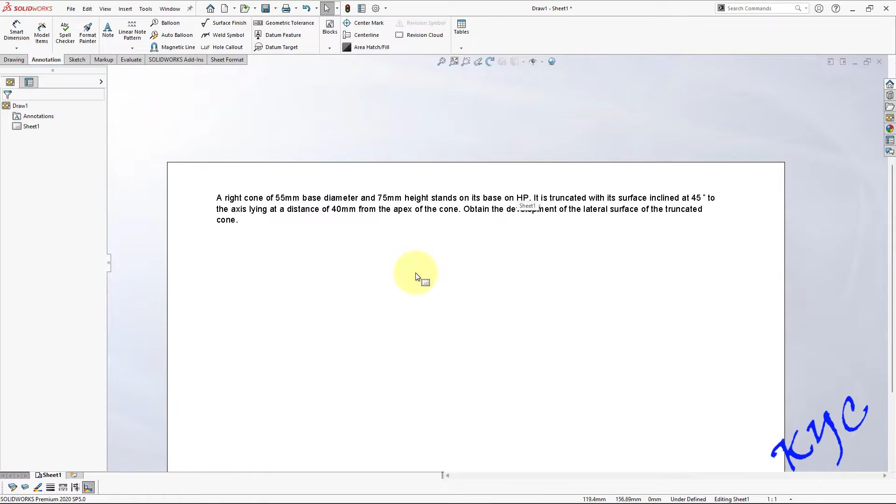Already I have copied the question from the question bank, I'll paste it here. So this is the question which I copied. Let me read it: A right cone of 55 mm base diameter, 75 mm height, stands on its base on HP. It is truncated with its surface inclined at 45 degrees to the axis and lying at a distance of 40 mm from the apex. Obtain the development of lateral surfaces of the truncated cone.

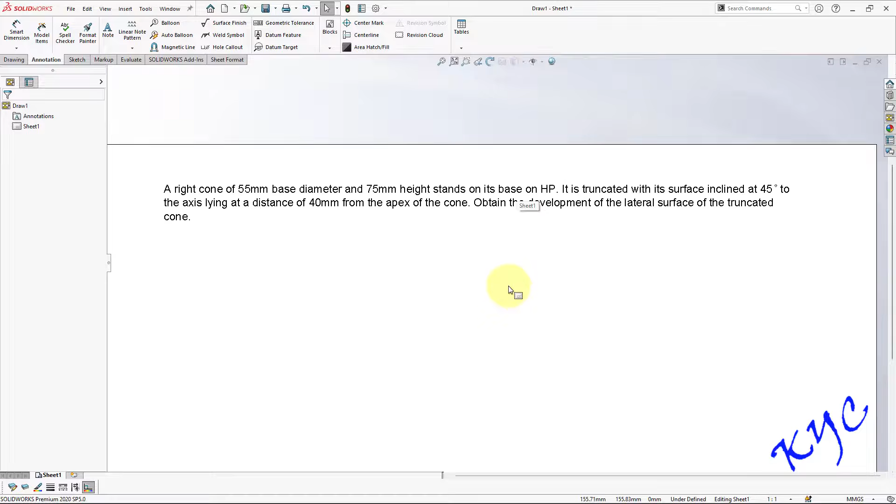So let us draw this. The very important parameter here is the definition of the solid. It's a cone, diameter is 55, height is 75. The section plane makes an angle of 45 degrees with respect to the axis and it is at a distance of 40 mm from the apex. So this is the data which we get from the question. Let us solve this now.

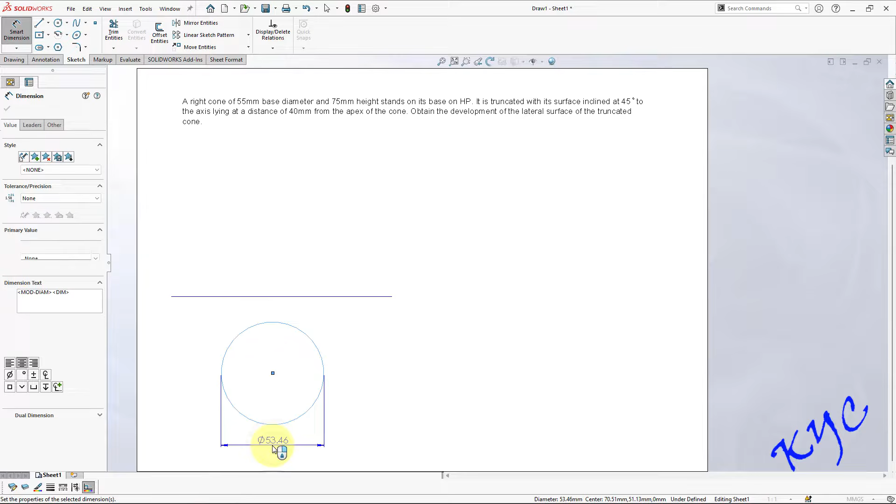Go to sketch, line, draw a line here, make sure it is horizontal. Go to circle, draw a circle, smart dimension, 55 mm is the diameter of the circle. Now go to line, from the center. How do I get the center? Place the cursor on the circumference of the circle, this will get highlighted, center.

From center to one of the nodes, you draw a line, so it's a radial line. I will be using circular sketch pattern to create a pattern here. Go to circular sketch pattern, click here to mention the center point on which this line should be rotated. This is the center point. As soon as you click here, it will get updated, you can see X and Y coordinates have been updated.

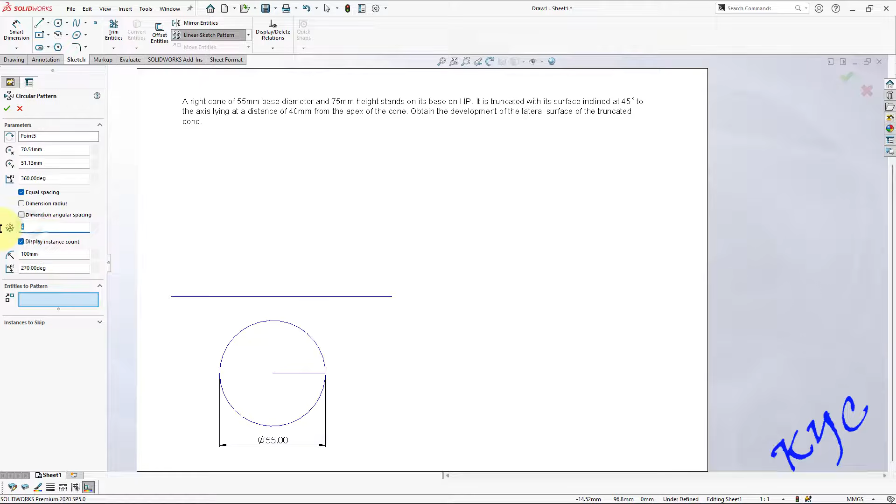360 degrees, yes, complete 360 degrees. The number of parts I want is 8. Entities to pattern, this is the line which I want to create a pattern with. Click OK, so this is how I get 8 parts. To remove this 8, you can just click on this 8 and delete it, only that will get deleted.

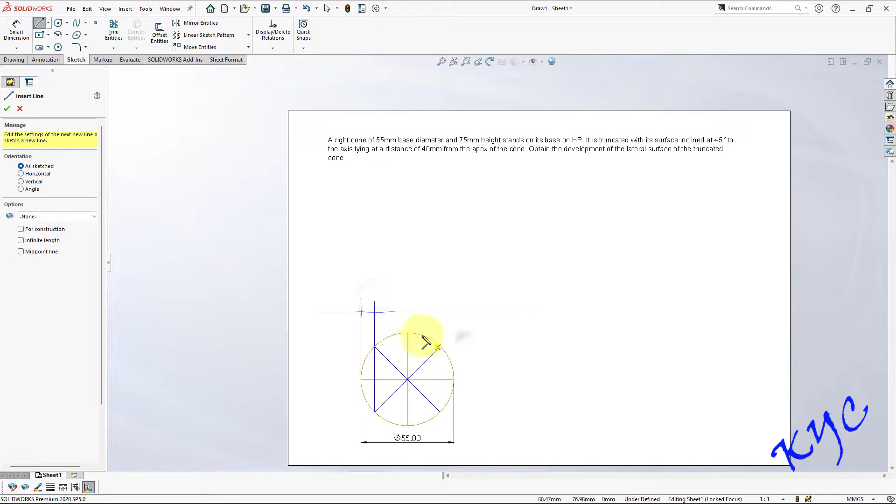Next, how do I draw the front view now? Go to line, drop projectors, make sure it is vertical. The relation should be vertical, you can see next to the cursor it shows vertical. Then remove this extended line by using power trim, as you can see here power trim is active. I draw, next I'll go to line.

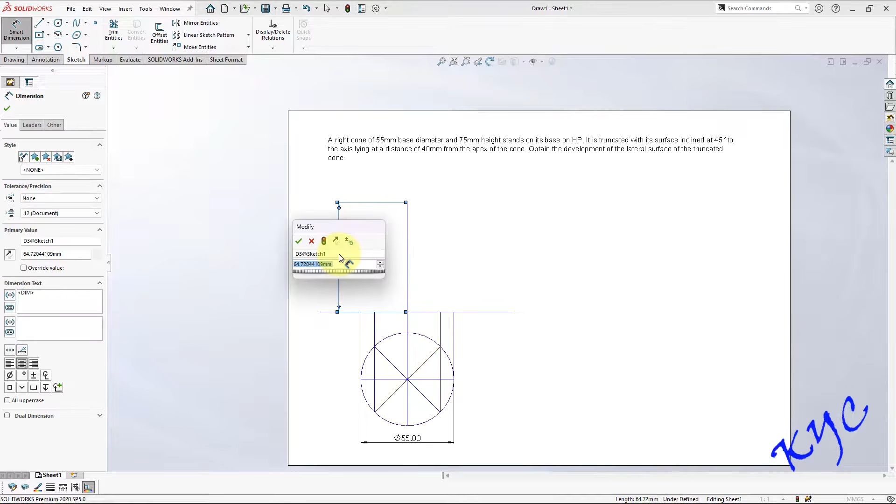I'll draw a line, they are given in the question, 75 mm. Diameter is 55 and the height is 75, so that I mentioned. Next, connect a line from the apex to the base.

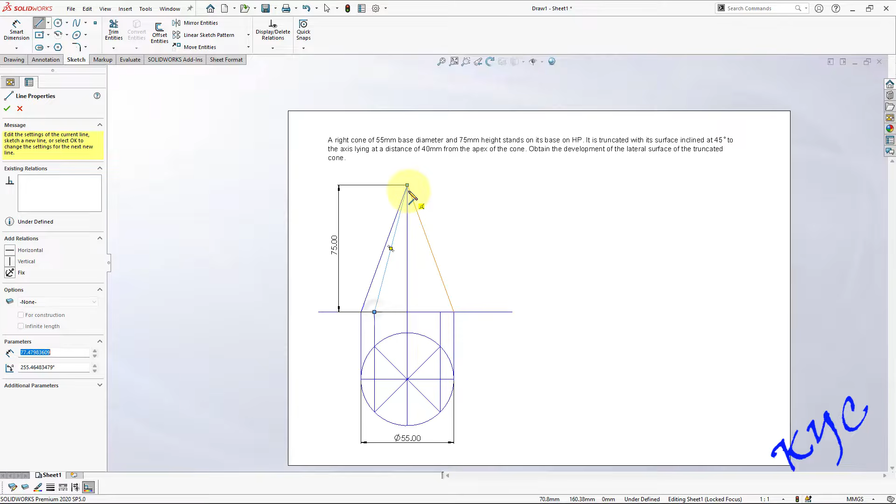These lines are called extreme generators. Whenever you see a cone, it's a curved surface, whereas you can see only the outline. These outlines will always be thick. Don't forget to make the base also thick, the base will also be thick, similarly the circle will be thick. This is before section, before sectioning this is how the cone will appear.

And this length we call it as slant height, you can see here 79.88. This is the true length of the slant height, which I am going to use to find the sector angle as well as for the development.

Now let me construct the section plane. In order to construct it, they are given in the question that it is at a distance of 40 mm from the apex. So I will draw a line here, approximately more than half of the length, select this end point, give the distance as 40.

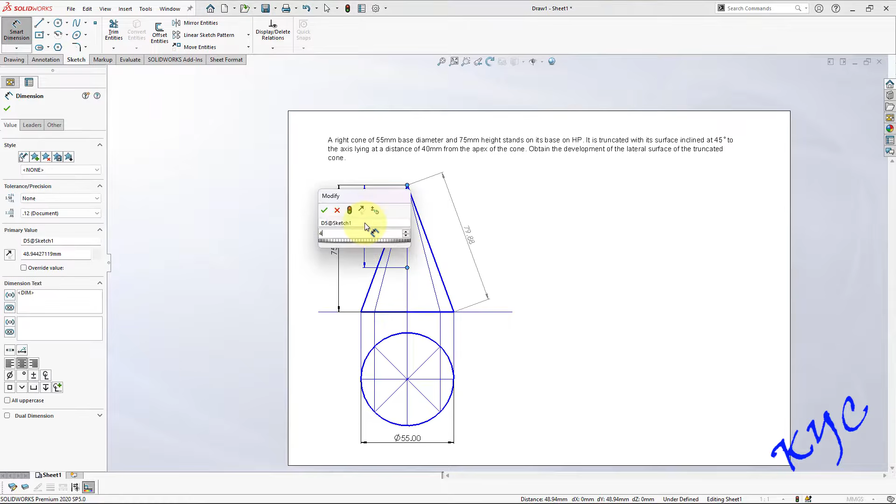Then go to line, from here draw an inclined line. Dimension this angle, angle should be 45 degrees, yes it is 45 degrees. Then use extend entities, extend the same line. Okay, this is the section line.

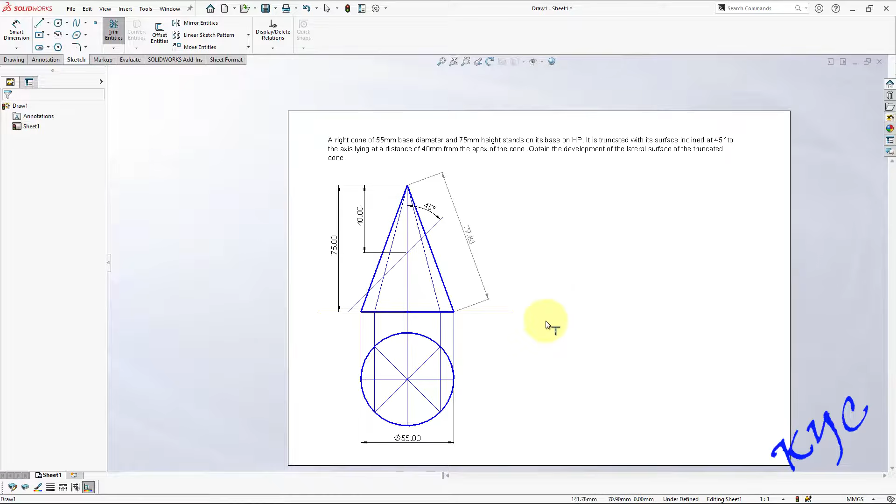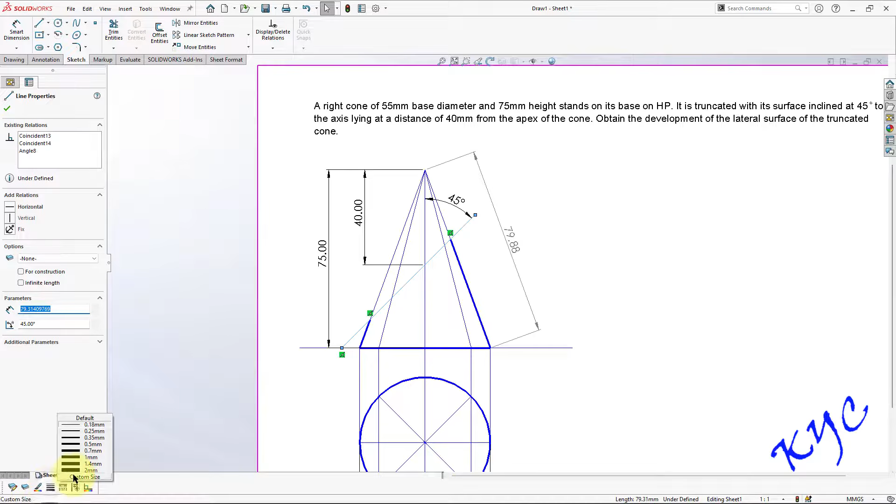Wherever it is passing through, that portion will be removed. Now how do I do that is by using the trim option. You can trim this, and I can redraw it since I have the apex. This portion, why did I make it thin? Because it is removed and this portion is retained. Select this line, how do I represent the section line is by making it chain type.

But the axis line will also be chain type. So in order to differentiate the axis line and the section line, we need to make the section line ends thick. There is another option in the line type where I can make use of thick and thin. I can select this line and make it thick and thin. You can see the ends are thick, but it's not so prominent. That is why I will not use this thick and thin option.

I will maintain it as chain type, but I will use lines here of approximately 5mm to 7mm. So we make lines of around 6mm or 5mm, select the line using box 1mm. Now you can see the ends are prominently seen. Why does this have to be made? Because the representation of the section line is such that the ends are thick. That is why we differentiate between the axis line and the section line.

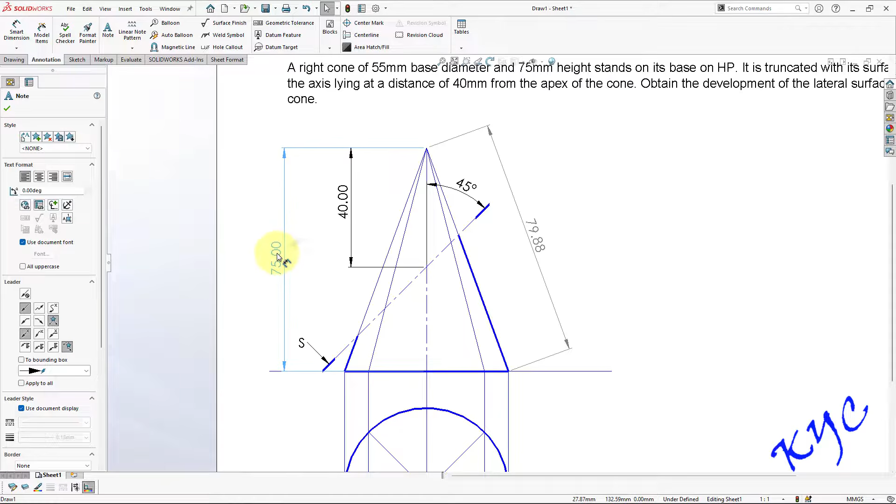Now I should show the section plane also. For that I'll go to note and use this note option, caps lock on, capital S. But I don't want this bent line. Click on this, you'll get a straight leader. Click on the straight leader and put it here. Make sure the arrow should always be perpendicular to the section plane, right?

Similarly here also I should do the same thing. So how do I do that? I'll use another option called balloon. Any option you can use, but the representation should be done. You can see the default has a circle as well. You can remove that, just select this and go to circular, go to none. You can see the circle is removed.

Now I want a text. Select text, type capital S. Both will give me the same output, whether I use note or balloon option, I'll get the same section plane, that is S.

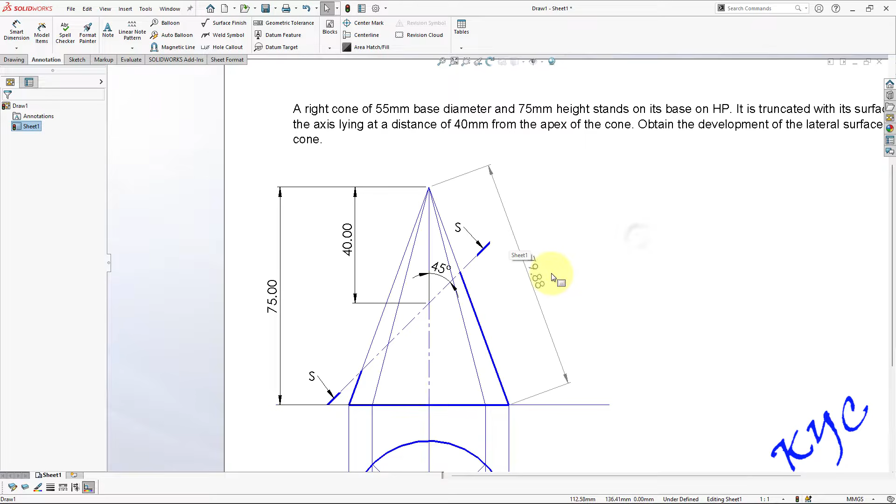Next, what I'll be doing is using this length, that is 79.88, to find the sector angle. So when you cut along the end generator and open it, you'll get an angle theta. That angle theta is called sector angle, because when I cut along the end generator and open it, I'll get a sector of an arc, and that sector of an arc will have an angle theta. That theta will be found using a formula: theta is equals to R by L into 360. That I'm going to use now. Before that, I'll do the notations part.

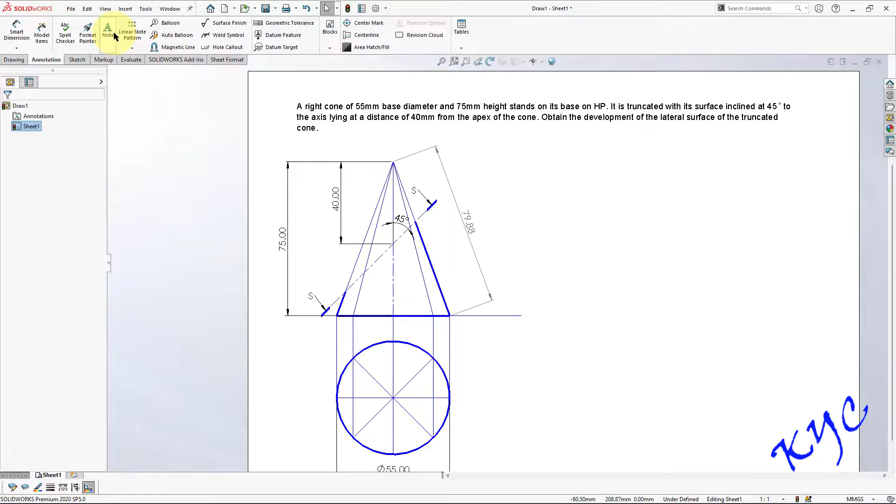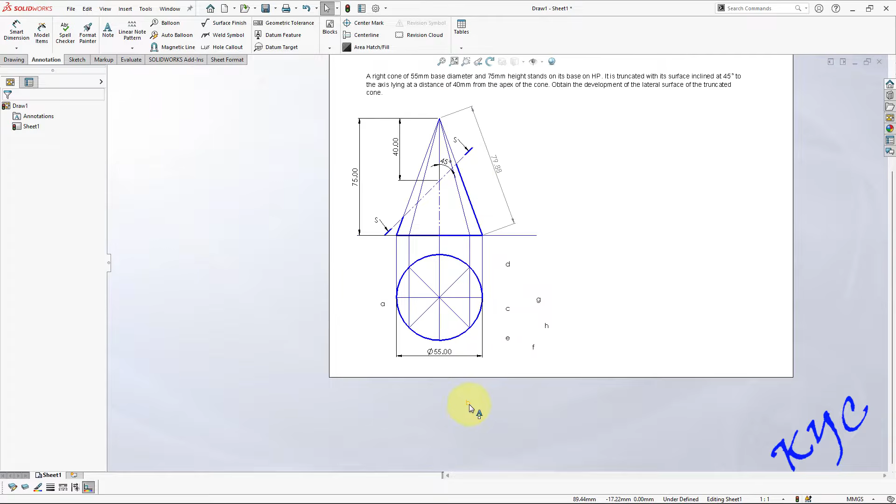A, B, C, D, E, F, G, H. Let me drag it and place it precisely by zooming in. Zoom in and place, then only it will be precise. A, B, C, D, E, F, G, H. So these are the 8 parts.

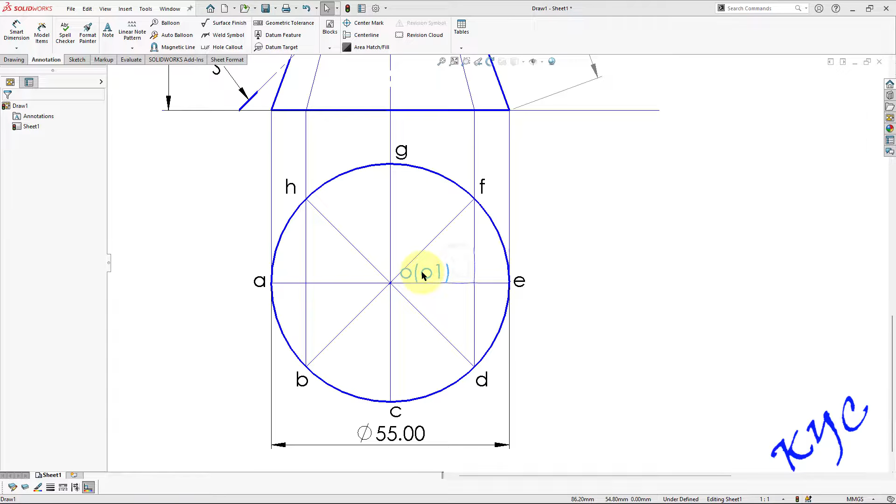Similarly, I should name the apex also, O or O1. So O will be the apex, O1 will be at the base, so O1 represents the axis.

Similarly, go to note. This is O dash. Similarly, I should name the remaining points by looking at the top view, I can name it easily. So the first point is A dash. The second one will be B dash in bracket H dash. The third point will be C dash in bracket G dash in bracket O1 dash. The fourth one will be D dash in bracket F dash. Similarly, the last point will be E dash.

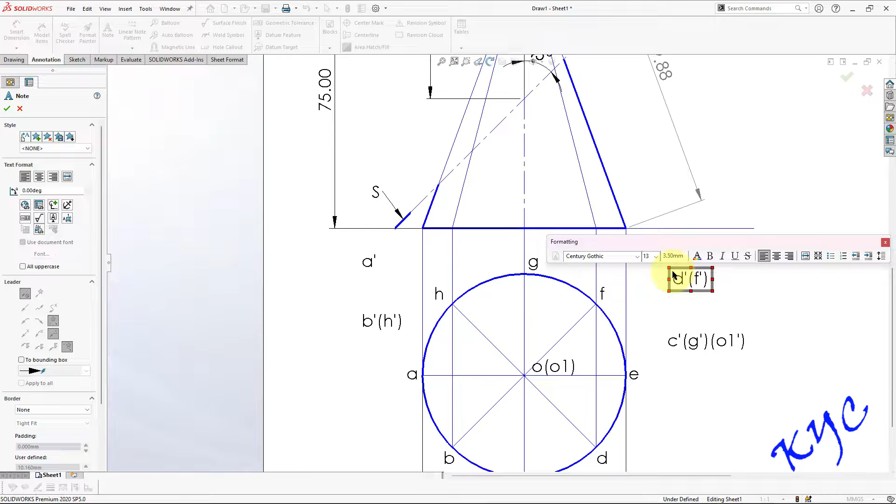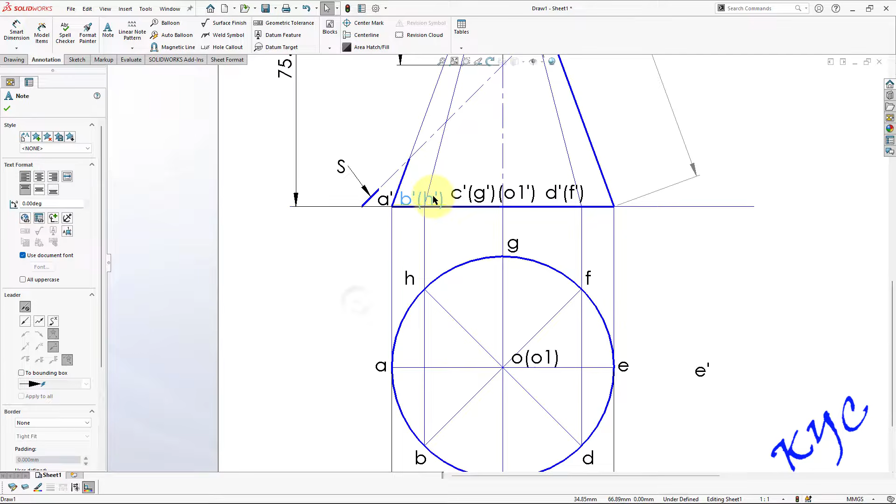Okay, this is A, this is B in bracket H, this is C in bracket G, so C dash in bracket G dash, D dash in bracket F dash, like that we need to name. So let me place it in the respective places so that there is no confusion. Okay, so this is how we tend to do it.

After the placement, next we'll go to the formula now. Note, click, select the font symbol, theta. How do I get theta is, make sure caps lock is off, type Q. Q stands for theta, is equals to. Make sure you press the right arrow key to come out of symbol. Now Century Gothic is active. Capital R by L into 360 degree. Degree symbol is here, you'll get insert symbol, that is theta, so that degree symbol you'll get.

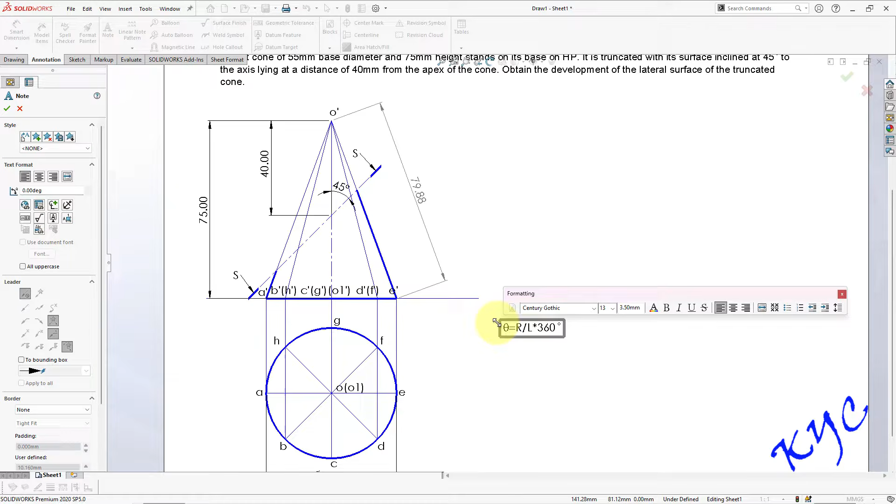So that degree symbol you'll get. So the formula which is used to find the sector angle is theta is equals to R by L into 360. R is the base radius, that is 55 by 2. L is the slant height, which is 79.88. Let me complete this by substituting the values.

Century Gothic is the default font. So 27.5 divided by L, 79.88. 79.88 into 360 degree symbol. This is where you'll get.

Press this. Next, theta is equal to Control C, Control V. I'll use copy paste so that I need not insert that symbol again. Next, what is the angle? The angle is 123.94. Use calculator and find this. Okay, you'll get 123.94. So 123.94 is the sector angle.

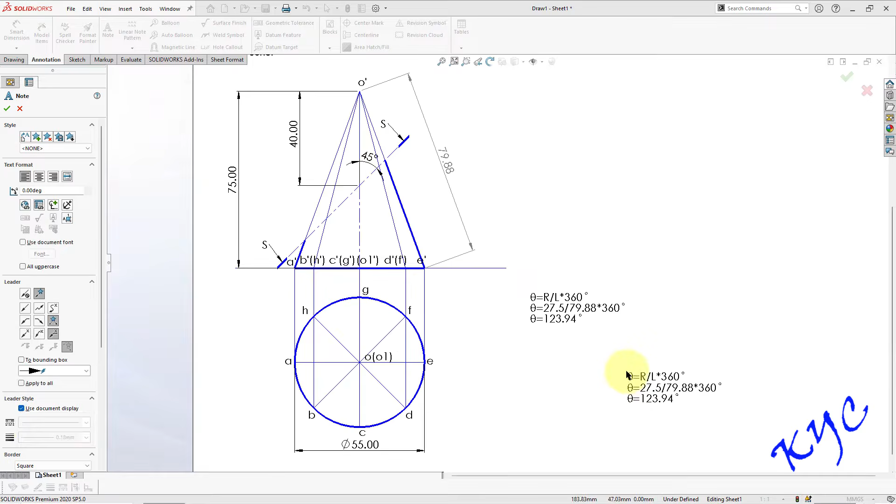The sector angle is 123.94. Well, let us insert the symbol called this degree. Okay, this angle we use to get the development, right? Now let us use this sector angle as well as the slant height to complete the development. So sector angle is

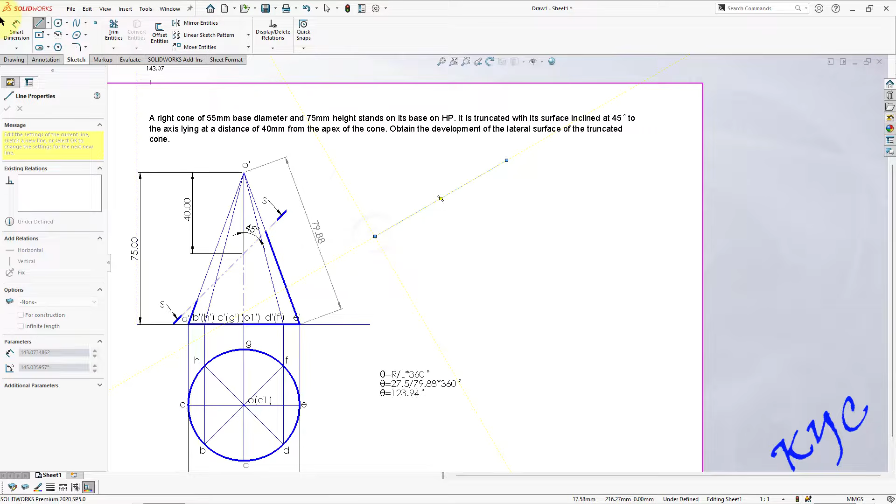123.94. Now go to line, draw a line of length 79.88. This 79.88 is the true length of the end generator. 79.88. 79.88. Click OK. Now you can see the line, right? This is 79.88. I will use circular sketch pattern.

Click here. This is the center around which this line will be rotated. How many do I want? I will type 9. I will show you the difference between 9 and how much is correct. The angle is 123.94. The angle is 123.94, and the line which I want is this.

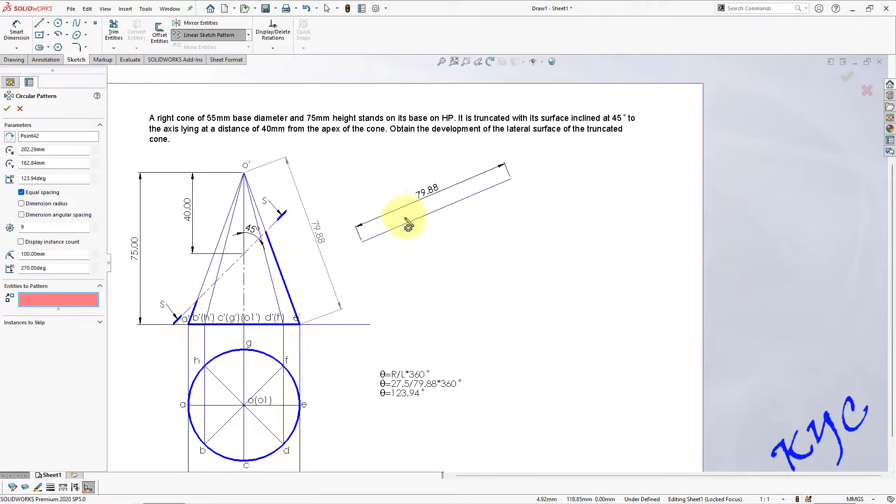But this positive will go in the other direction. So you can see here the arrow mark. This is pointing upward. That is, when I click OK, all the parts will be divided here. I want it below. So I should type minus 123.94. When I type minus 123.94, you can see. So it will start here and it will end here.

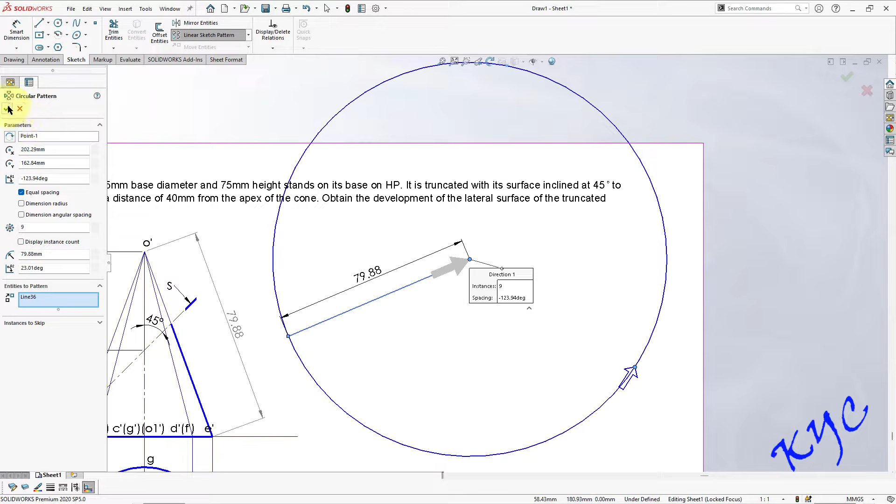Now I'll say OK. Once you say OK, you can just observe whether 8 parts have been created or not. Whether there are 8 parts, just check. 1, 2, 3, 4, 5, 6, 7, 8. So 8 parts are there, but if you count the number of lines, 1, 2, 3, 4, 5, 6, 7, 8, 9. There are 9 lines. That is why I gave 9. Otherwise, I would have given 8.

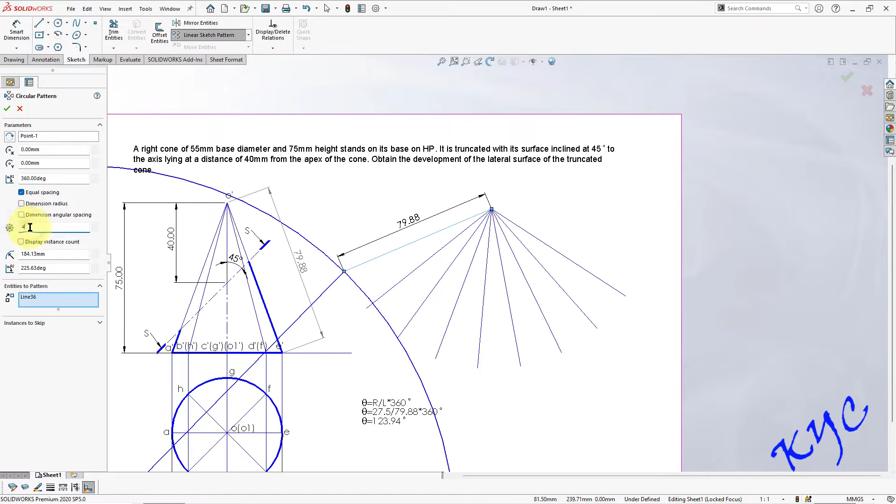If you give 8, what will happen is you'll get 7 parts. So be careful while mentioning the parameter here. Especially this parameter 4. Okay, right now default is 4. But don't give 8. Give 9 because it is inclusive of this line. It is 9, inclusive of this line. That's why, don't make this mistake.

Next, I'll go to arc. I'll select this as center, this as a start point, and I'll draw the arc and trim this extended portion. This is the sector what I was talking about. The angle between these two lines will be 123.94. You can always dimension it and keep it.

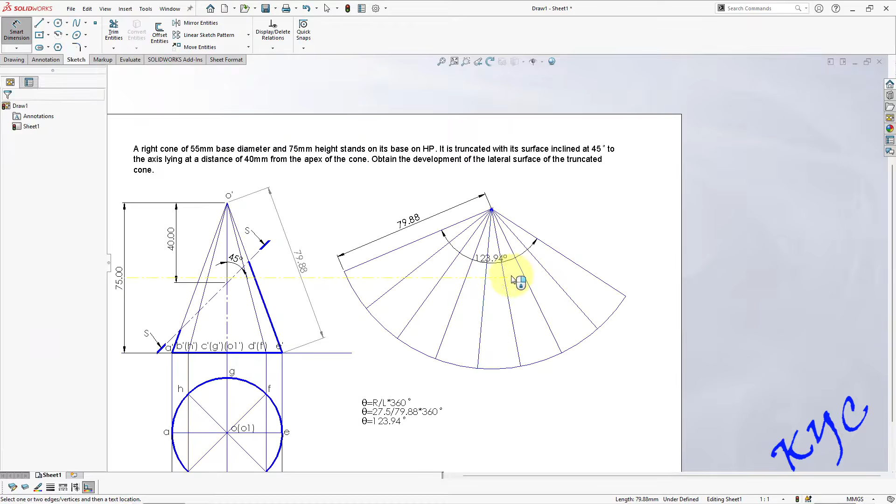So this is the development before sectioning. Before sectioning, it appears like this. Now after sectioning, how does it appear. So what we have to do is, we have to present all the section points on the development. How do I present all the points on the development? So let us go to the front view, top view, and let us assess how many section points are there.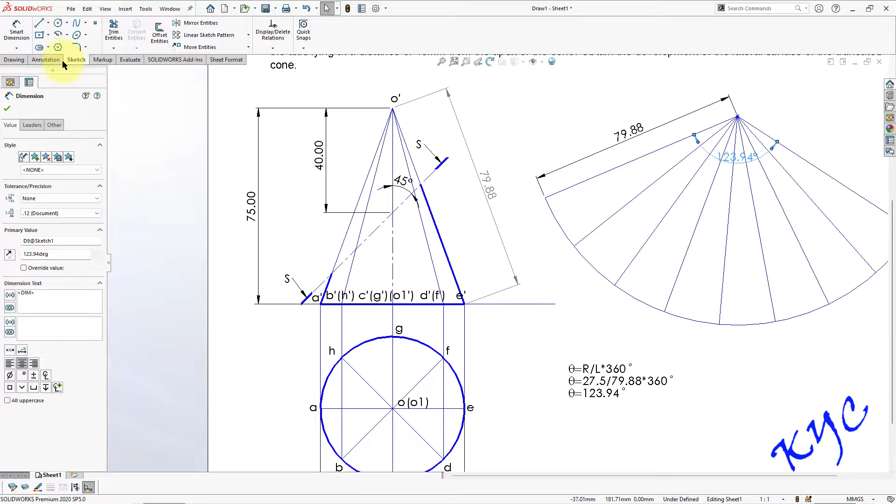So as you can see here, the intersection of the section plane with the end generator. Let us drop the projector. This is where exactly it is intersecting in between O dash and A dash. So let me drop the projector onto OA, and it should be vertical. Remember, it should be vertical. So this is where exactly the first section point is.

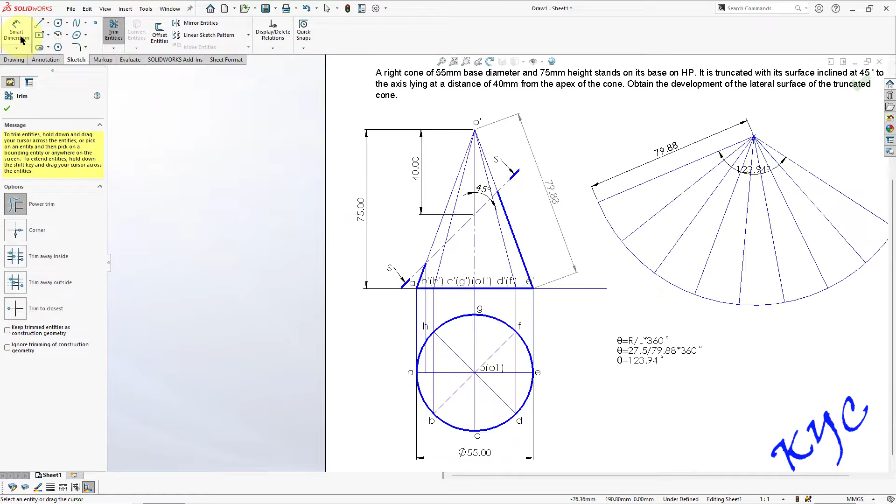Similarly, there is an intersection of section plane exactly at this location. Okay, exactly at this location it is intersecting. If you are not getting the intersection point, you can trim it and redraw that line so that you will get the point easily. Now I can draw a line, and this line should coincide with this H. Okay, then the same line should be extended towards B, because OB and OH both are overlapping in the front view. Okay, so you'll get the first section point here, second section point here.

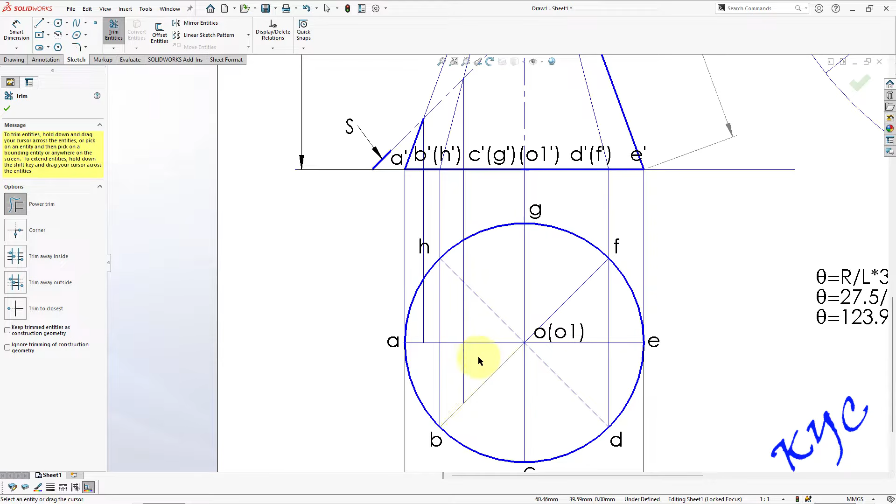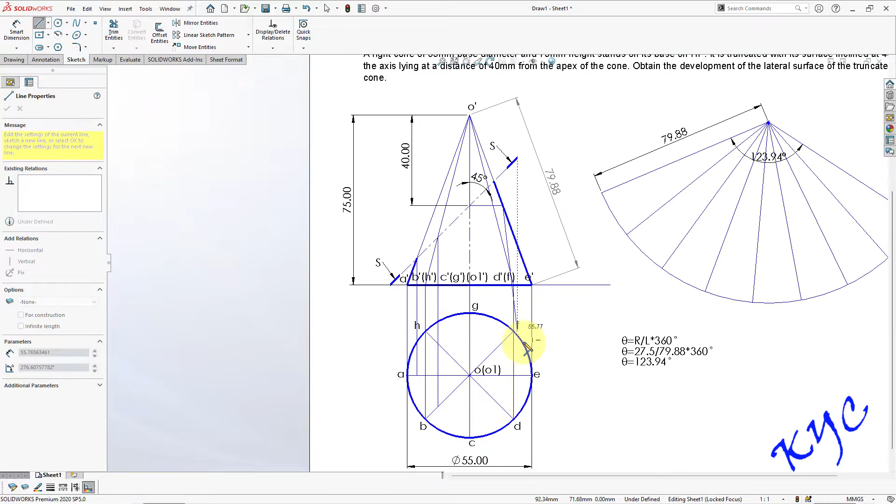Right now, next comes the section point on O dash C dash, exactly here. So how do I drop the projector? If I drop the projector, it will lie on the same line. So for that, what we do is, we follow the constructions. Drop a projector on the slant edge, then drop a projector on O dash, E dash, that is OE. Make sure it is vertical.

Next, we go to arc. Select this arc, rotate it. Select this arc, rotate it, trim it.

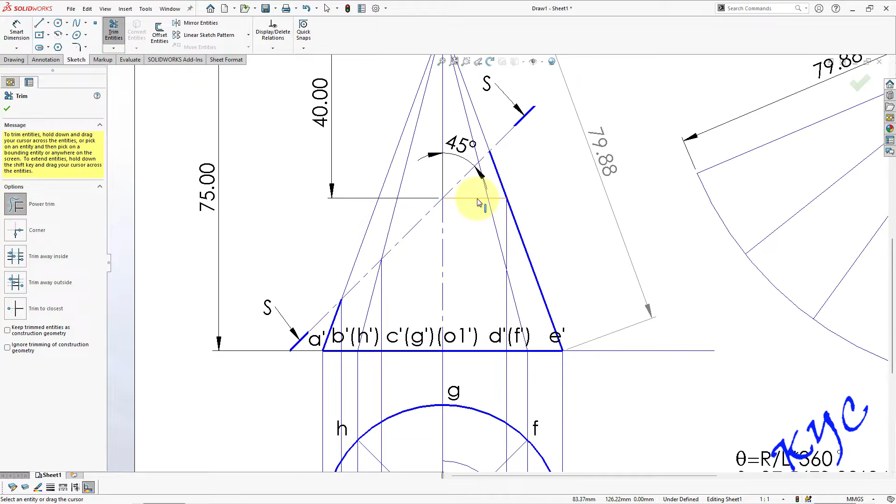These 2 points we have obtained. What we are doing is trying to transfer this length here. That's all, we're not doing anything else. We are transferring this length here by using the construction.

So I got 1, 2, 3, 4, 5 section points right now. Still there are 3 more. Where are those 3? Here, there is one more section point. I'll go to trim, I'll trim this line because I'm not getting the intersection point.

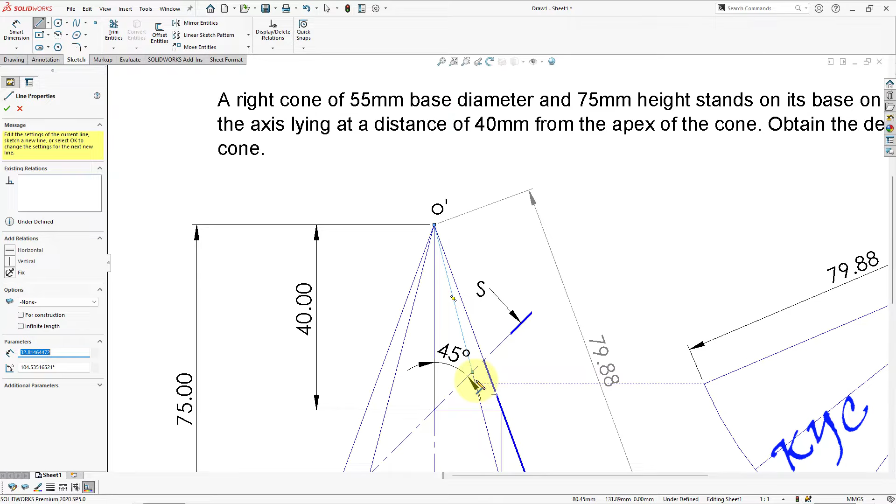I'll draw it now, the projector from here, that is from onto OD and OF. First I'll drop it on OF. I'll trim this and extend this onto D. Make sure the projector is always vertical.

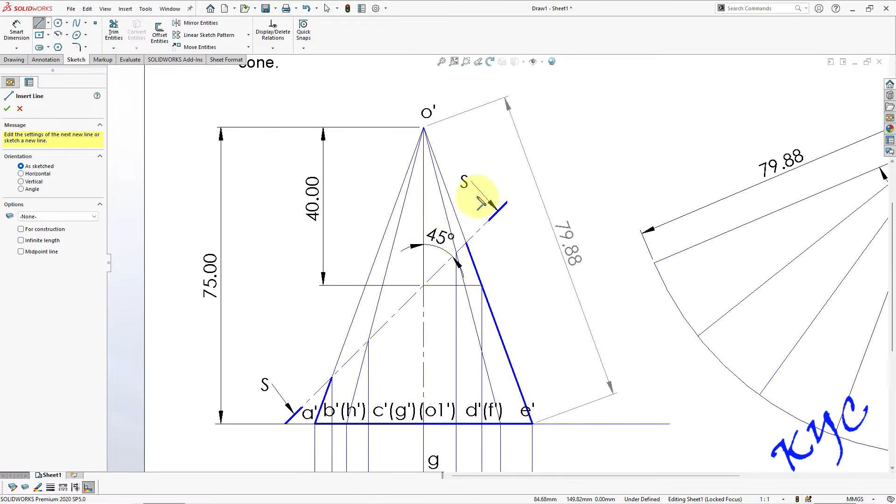Don't click arbitrarily. Next, the last point, that is on O dash E dash, we need to put it on OE. So totally we get 8 section points. Let us name those 8 points now.

Go to note. 1, 2, 3, 4, 5, 6, 7, 8. Let me place it precisely.

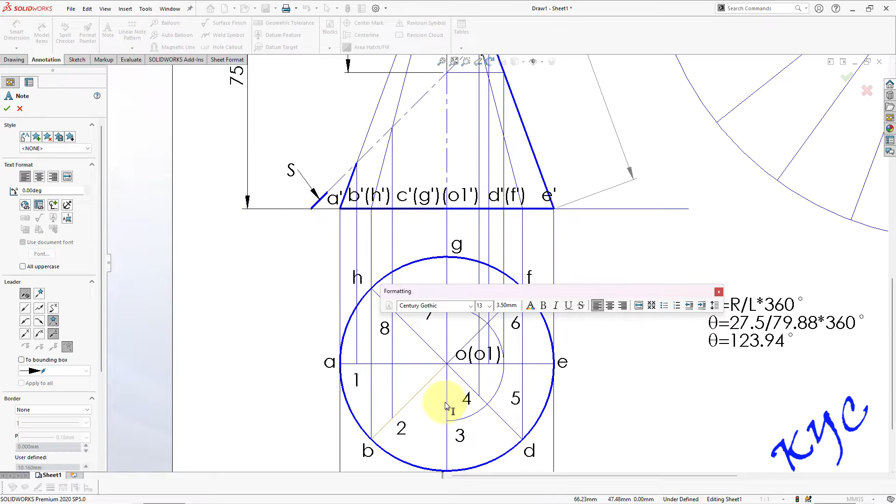This is the first section point. This is the second section point. This is the third section point. This is the fourth section point. This is the fifth section point. This is the sixth section point. The seventh section point is here, and the eighth one will be here.

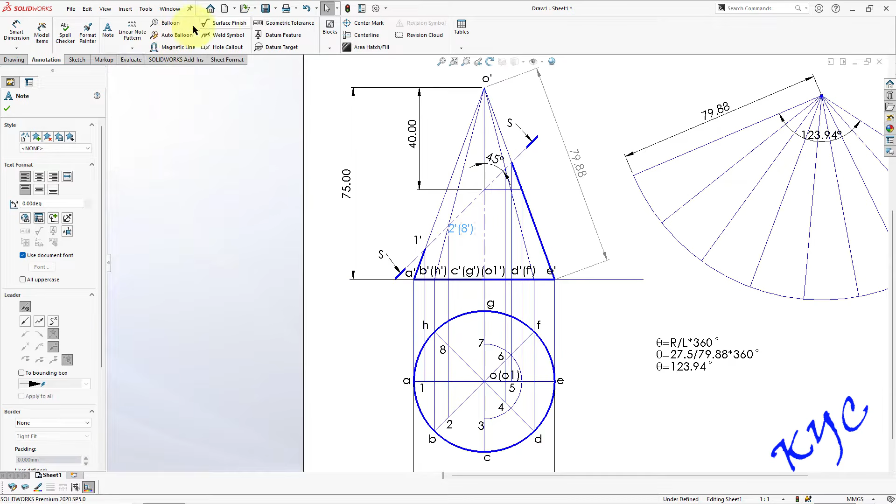So by looking at this, I can name the front view also easily, right? I'll go to note. I'll type this as 1 dash. Similarly here, this point would be 2 dash in bracket 8 dash. Where is that point? Exactly here. 2 dash 8 dash. So similarly now next, 3 dash and 7 dash will be here.

So 3 dash in bracket 7 dash here. The next point, if you observe, look at the top view, 4 dash in bracket 6 dash. This is the point, 4 dash in bracket 6 dash. Type the empty space, then you can drag it and place it. 4 dash 6 dash. The last point is 5 dash.

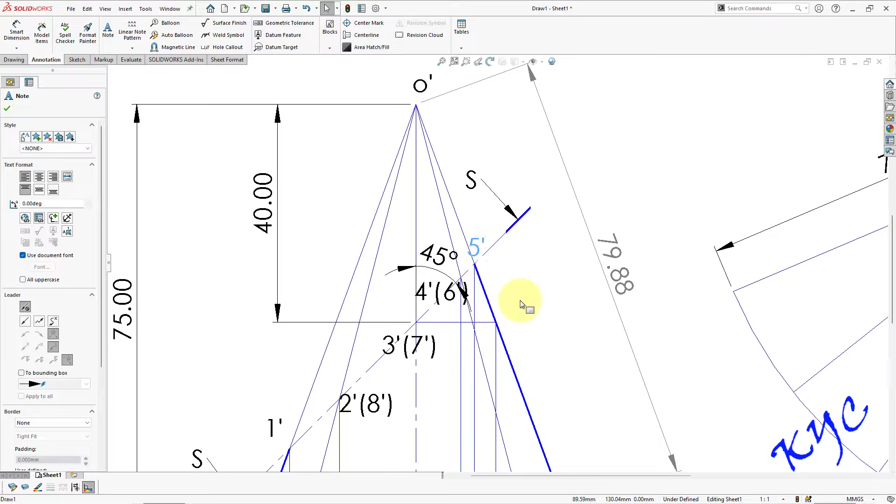Okay, so now let us place it. 4 dash 6 dash here, 5 dash here. Okay, so this is how we get in front view the section points. These points have to be presented on the development.

So on OA I'll get 1, on OB I'll get 2, like that, 3, 4, 5, 6 I need to plot it. How do I do that? First let me name these points. How do I name it? Similar to the naming we did in the solids, here also we should do the same thing.

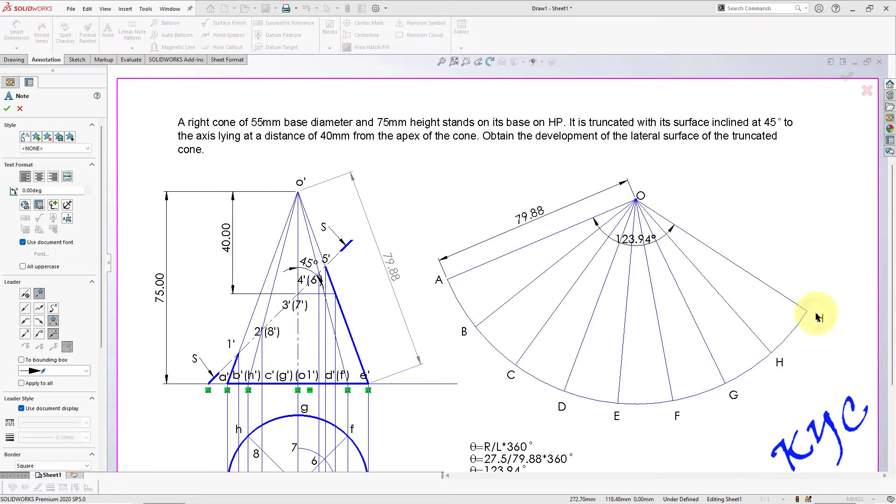O, this is A, B, C, D, E, F, G, H and A. Okay, so these are the end generators. We have cut along OA, that is why on both sides we get OA. So we have to mark 1, 2, 3, 4.

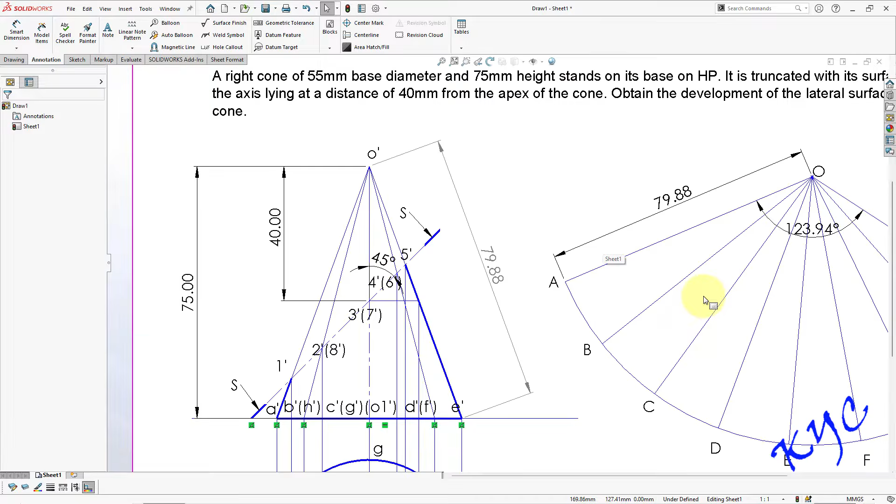So if you observe carefully, only O dash 1 dash and O dash 5 dash are having true lengths, because already I have told you, any measurement whatever we do, it should be having true length. There should be no apparent length, right? So in order to do that, we need to transfer all the points onto the true length.

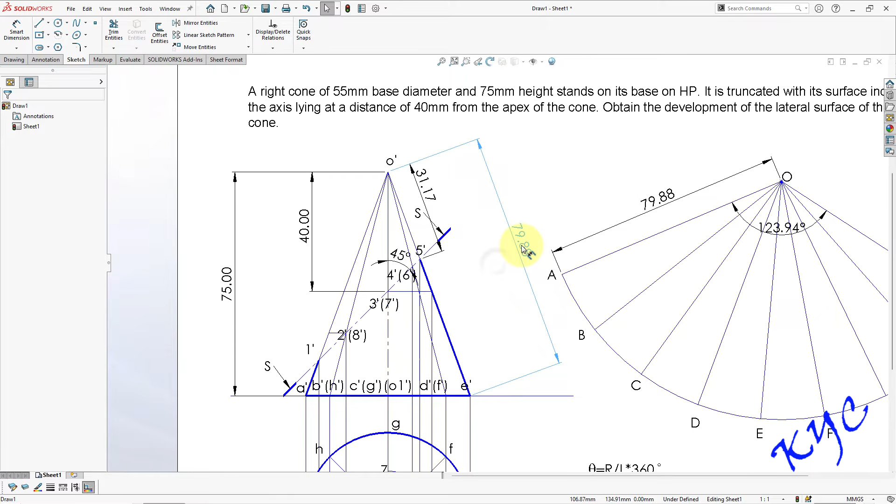For example, if I want to measure 1, O dash to 2 dash, I need to present it on this. If I measure the distance, for instance, now I want to measure the distance from 5 dash to O dash. So this is the measurement which I get, that is 31.17. Let me drag this, let me drag it here.

Similarly, if I want to measure the dimension of 1 dash, see O dash to 1 dash, this is the dimension, that is 67.27. Okay, similarly if I want to measure O dash to 2 dash, this is 57.52. Click OK. Always remember, the smaller dimension should be inside, the bigger dimension should be outside.

Similarly, if I want to measure the dimension from here to here, it is 42.60. So all these dimensions play an important role now. Why? Because we have transferred it onto the true length and we are measuring it. Very important, none of the dimensions should be having apparent length.

All, if you observe here, every end generator will be having 79.88. If you measure directly from here to here, this end generator will not be 79.88, it will be much lesser than that.

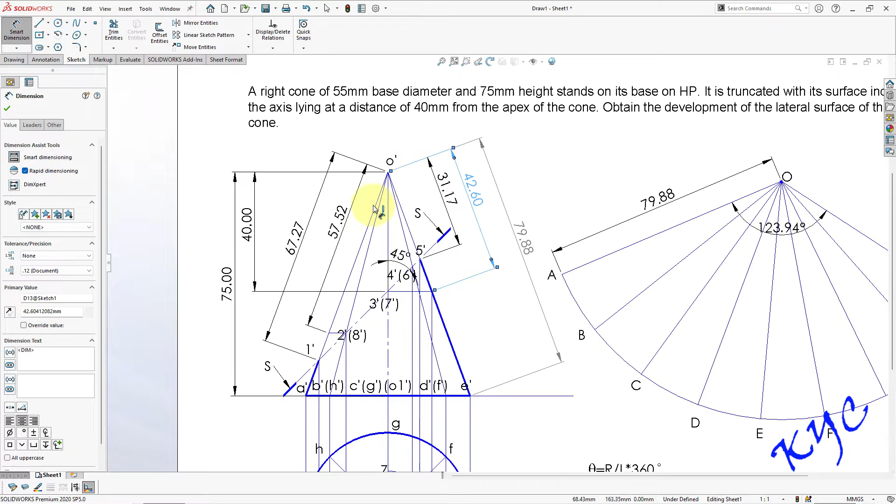That is why you don't measure it directly. Transfer it onto the end generator which has the true length, then measure the length, then you will get it, right?

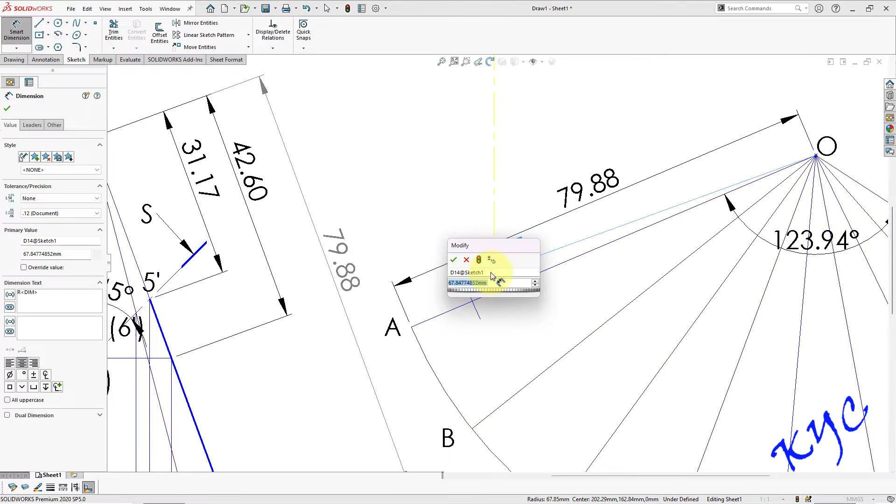Now let us take one at a time. The first point is 67.27. Go to arc, approximately 67.27, draw an arc, give the dimension for it. This is 67.27. The same kind of arc will be there on the other side, because both are having the same point, OA. So repeat the same thing on the other end. Approximately take it up to 67, draw an arc, go to smart dimension, measure it as 67.27.

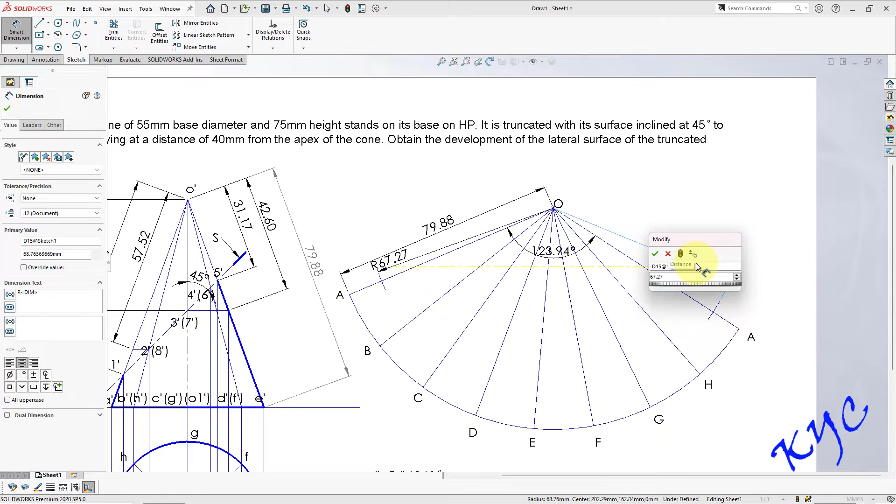Okay, this completes the first section point. First section point is over. Now second section point is having 57.52. Same thing you repeat it. Select the center, approximately 57. Draw an arc. If you want to repeat this, again you can repeat, because OB and OH will be having the same radius, so you can draw it approximately. Later you can dimension it.

So OB, OH over. Similarly here, the third one will be having 42.60. Select this, 42.60. First point is this, that is on OC. Then once again on OG. Select this, on OG, this. Later I will dimension and try to make it accurate.

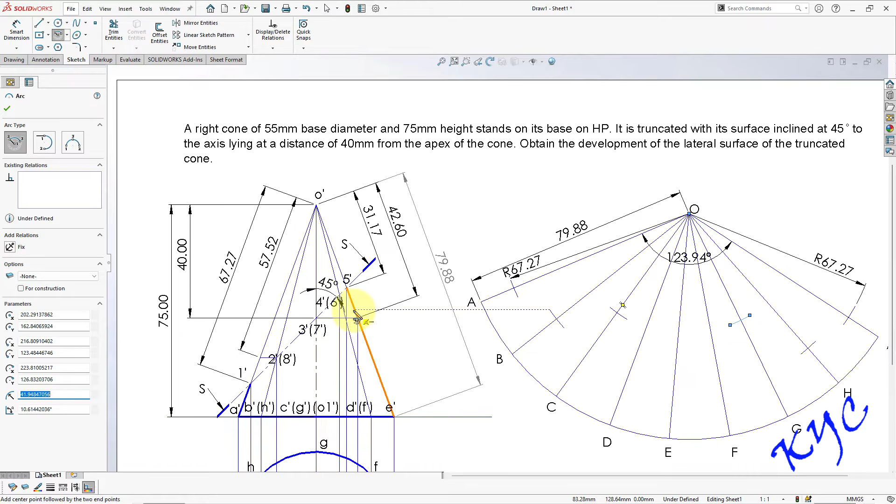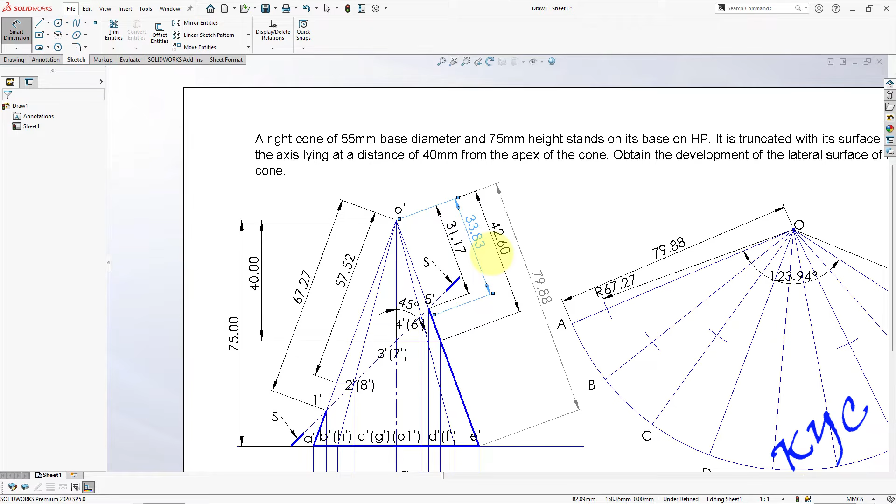Next, the fourth and the sixth point, which we have not dimensioned. So just take this point, project it here, trim it, measure it. Let me drag this a little bit so there is sufficient space for my fourth point. 33.83, this is on OD and OF.

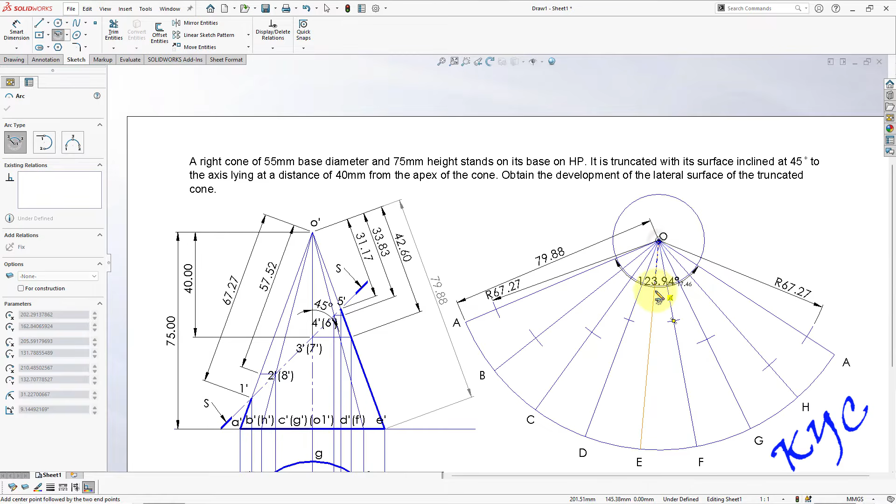Go to arc, approximately 33 mm. Take 33, approximately, draw an arc here. Repeat the same thing on the other side also. Now the last point is 31, that is on OE. Draw an arc. After drawing all these arcs, now it's very easy.

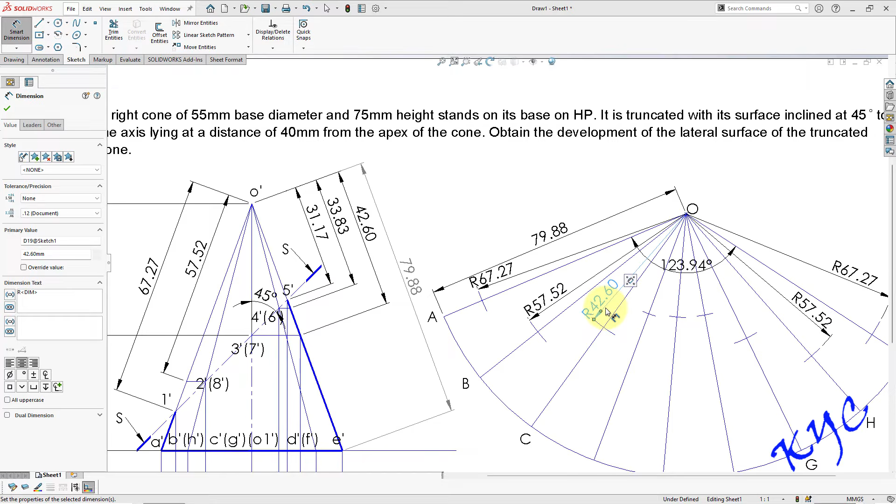Select this. The second point is 57.52. Similarly here, click OK, this one is also 57.52. So this B and H is done. Next is C and G, so this is OC and OG, 42.6. Similarly this is 42.6.

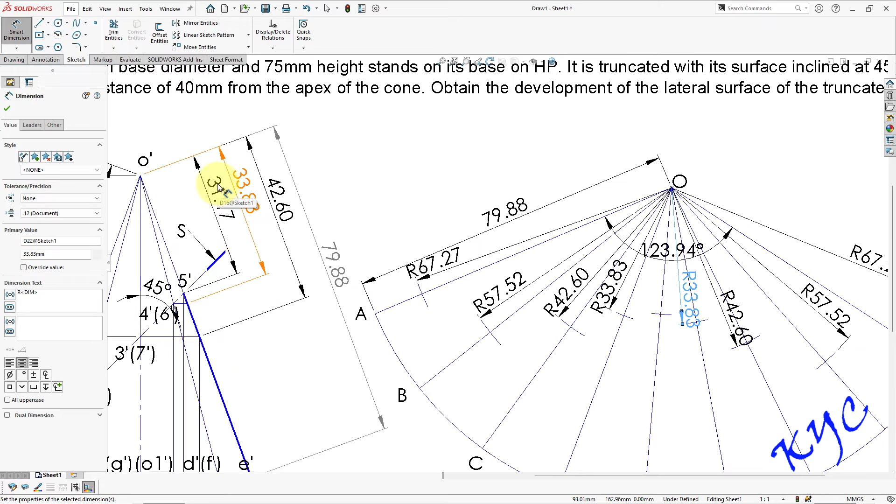Click OK. This one is 33.83. Similarly, this distance is 33.83. Last one, the last one is having 31.17. Click OK. Now after this, I have to join all these points.

Since it is a cone, I cannot use a straight line. I should use the spline tool to do this. So I will go to trim and trim this portion so I get the intersection point correctly, otherwise I will not get the intersection point correctly. That is why I will use the trim option.

Now I will go to spline, select these end points. You can see the end points. Click on these points. After selecting the last point, press escape. When you press escape, the curve will be created. Now you can select this curve and make it 0.5 mm.

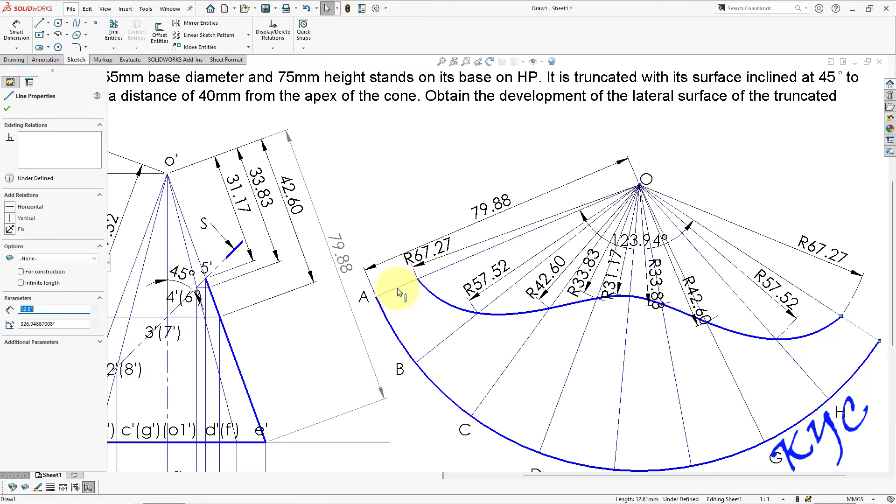Similarly, this outer curve should be 0.5 mm. Here, this portion of the arc, the end generator, should be thick. So trim it and redraw it. Why? Because if you select that line, the entire line will be selected, so we want only a portion of the line to be selected. That's why I have trimmed and redrawn.

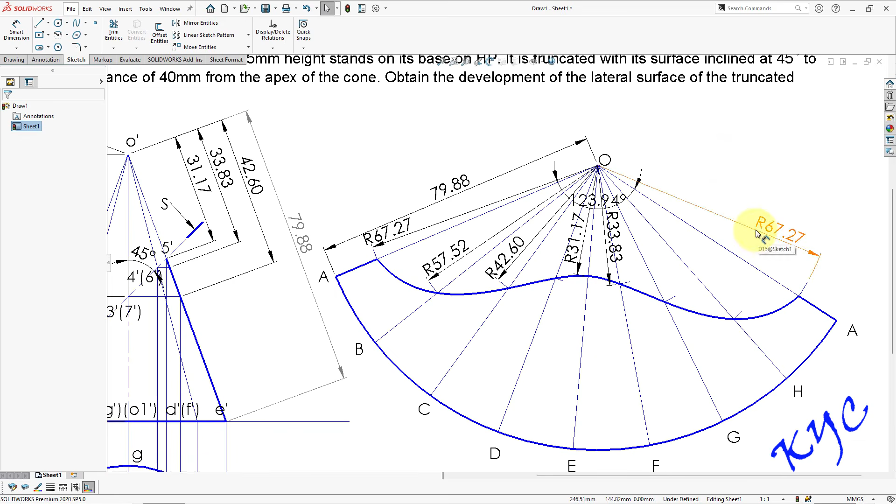Okay, so this is how a cone will be created. You can remove multiple dimensions. For example, this can be removed, this can be removed, this can be removed. Like this, you can minimize the dimensions, letting some of the dimensions remain. So you can remove this also. You can drag this up.

Let us go to the top view. Let us complete the top view. How do I complete the top view? By going to spline. Select this, select this, select this, select this, select this, select this, select this, select this. So this line will be thick, this line will be thick.

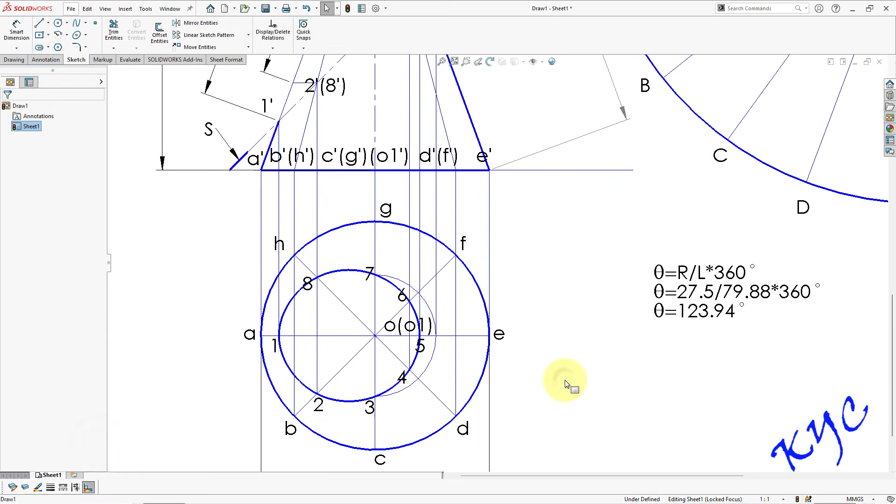So you know about the XY line, VP, HP, right? You need to place XY, VP, HP. Don't forget this. In all the problems you have to mention whether you have used first angle or third angle, because of that we have to mention it.